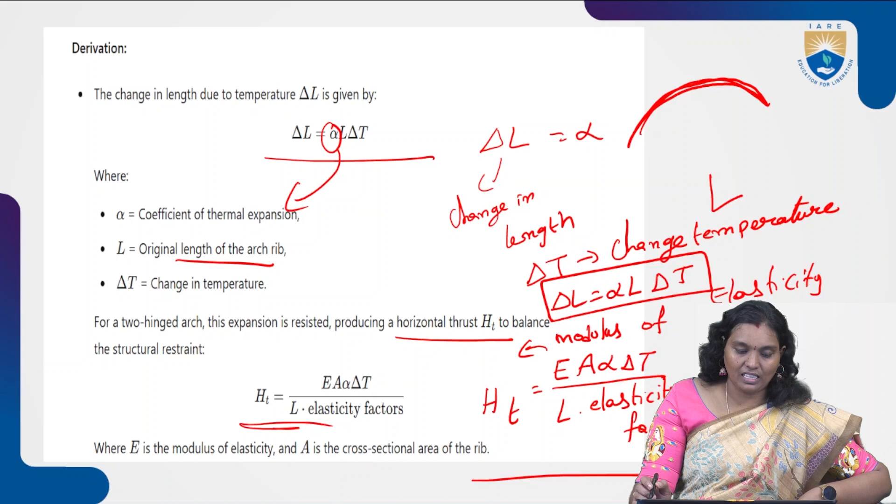E is nothing but the modulus of elasticity. It depends upon which type of material is used at the time of construction of the arch element. So that is the elastic constant, and it influences the change in getting this horizontal thrust. This is the formula we are using for these conditions.

Differential temperature occurs when the top and bottom of the arch rib experience different temperatures, for example sun on one side and shade on the other. So one portion may be affected by sun, and the other only by shadow. These scenarios we may observe within the length of this arch.

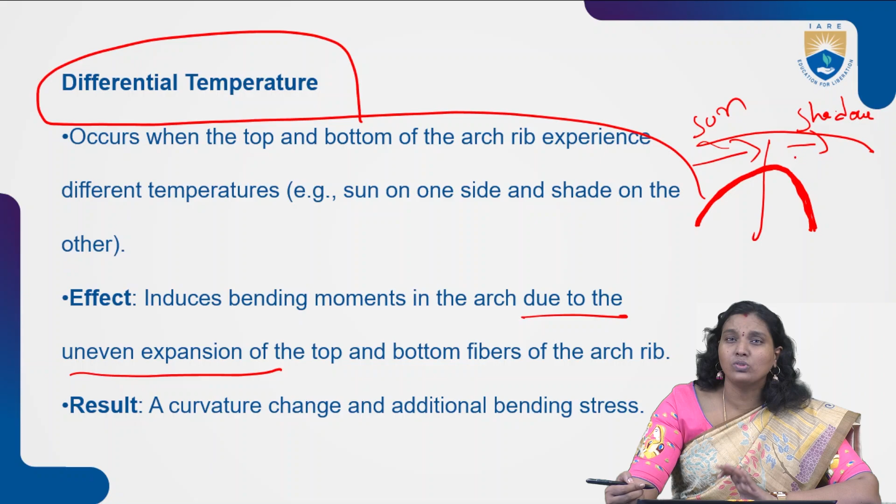So such temperature difference, how do we understand its effects and results? It induces bending moments in the arch due to uneven expansion throughout the length, since there is no similarity in the temperature effect. This induces bending moment due to uneven expansion of the top and bottom fibers of that particular arch rib.

Whenever we consider that throughout the length of the arch there is uniform temperature change, that is the scenario from the previous slide. Now for differential temperature, some portion of the length of the arch has a different temperature effect than the remaining portion. This depends on the location on the arch, and it affects the bending moment due to uneven expansion of the top and bottom fibers of the arch.

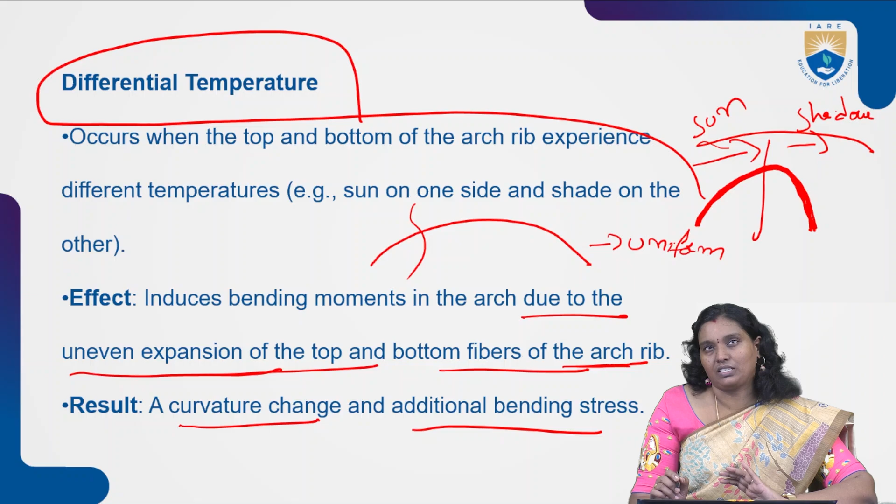This results in curvature change and additional bending stresses. These are the things we need to understand in differential temperature. At the time of differential temperature, we have to understand these kinds of scenarios regarding the bending moment.

Whenever there is uniformity, for that condition we have this normal thrust. The bending moment due to differential temperature is equal to E I delta T diff divided by R, where R is the radius of curvature of the arch rib.

I is the moment of inertia, E is the elastic constant depending on what type of material is used at the time of construction of the arch, and we also consider the temperature difference between the top and bottom fibers.

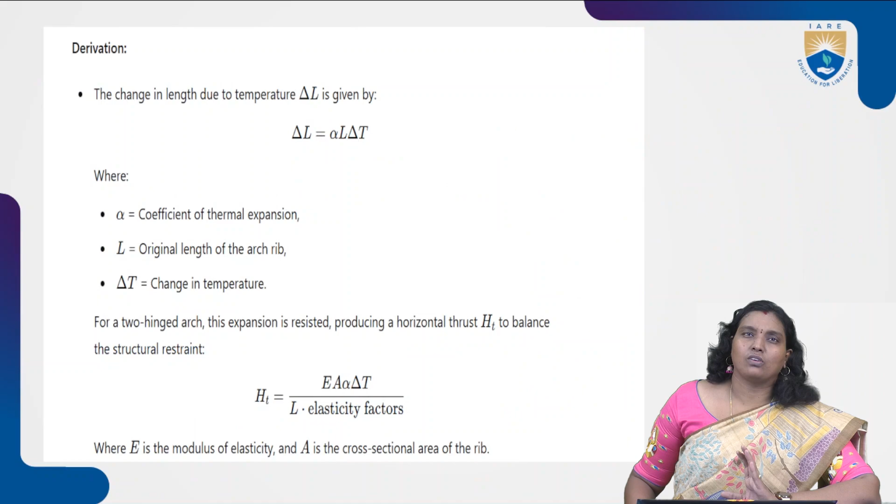So these are the temperature effects. Whenever we come under these secondary changes, those temperature changes may be uniform or differential heating of the particular arch, and these are the effects we get from these temperature changes.

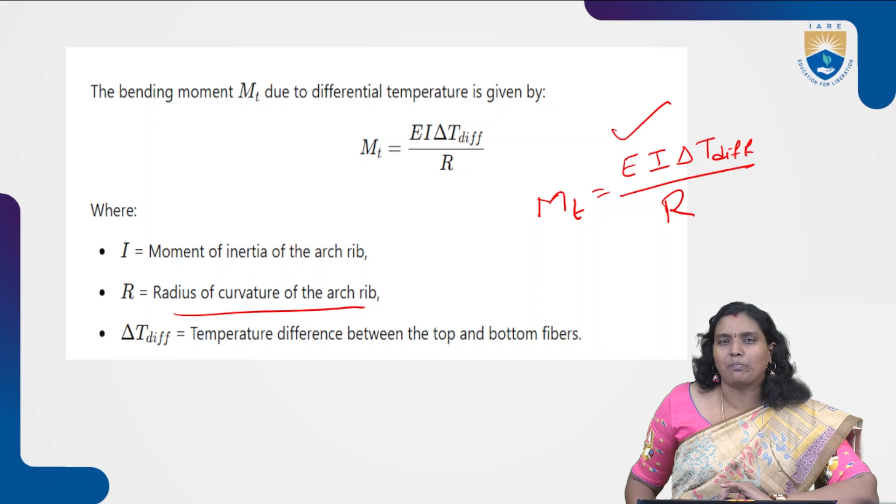Now, elastic shortening of the arch rib. It refers to the reduction in length of the arch rib under compressive forces. This shortening affects the geometry of the arch and creates additional secondary stresses due to elastic shortening of the arch rib.

It reduces the length of the arch, and because of these compressive forces, it affects the geometry of the arch and creates additional secondary stresses. Under applied loads, the arch rib experiences compression, causing a shortening in its length, which alters the arch's horizontal thrust and changes its geometry.

The shortening in the rib can lead to an increase in horizontal thrust to maintain equilibrium. This change in geometry is required because the shortening of the rib leads to an increase in horizontal thrust to maintain the equilibrium.

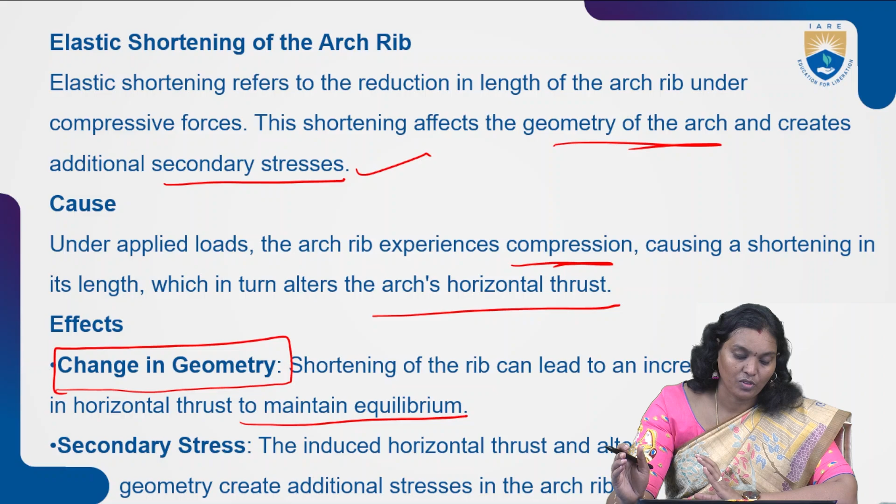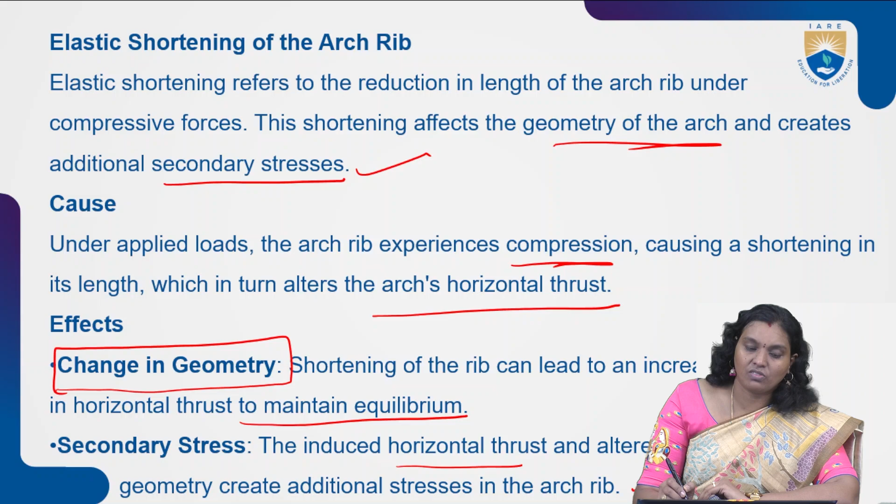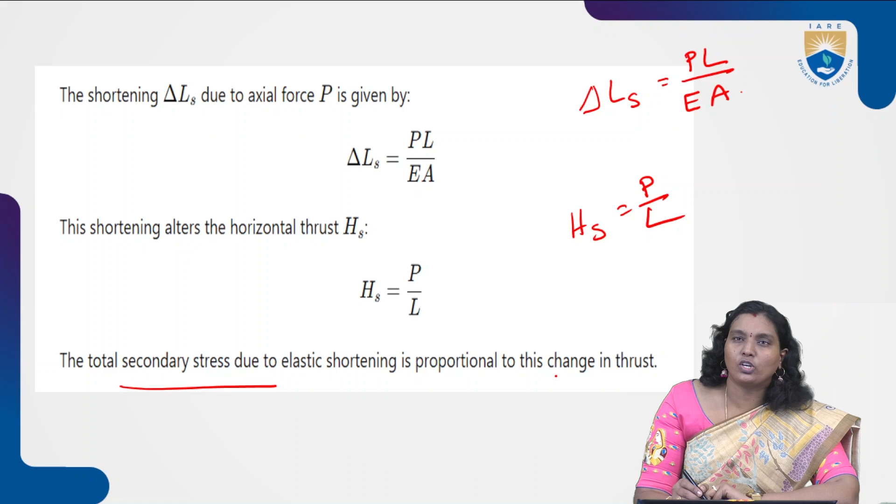So the total secondary stress due to elastic shortening is proportional to the change in thrust. Coming to total secondary stress, the combined secondary stress due to temperature effects and elastic shortening can be obtained by superposing the horizontal thrust and moment effects due to each phenomenon, affecting both the moments and the horizontal thrust.

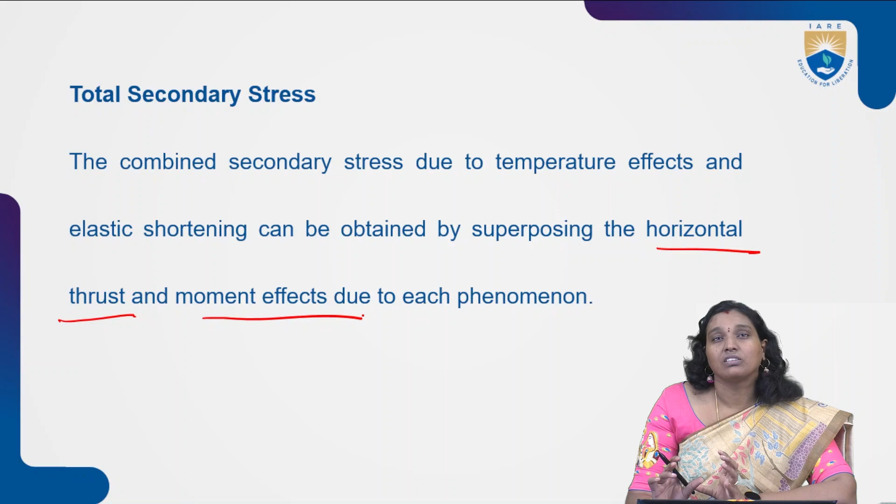For example, whenever a two-hinged arch has a span of 40 meters, and this curvature radius is equal to 20 meters. A uniform temperature is applied, and the modulus of elasticity is equal to 200 gigapascals. The cross-sectional area is equal to 0.3 meter square, and the coefficient of thermal expansion is equal to 12 into 10 to the power of minus 6 per centigrade. These are the given data. Now we are going to identify the problem: it is a two-hinged circular arch.

Now calculate the change in the length of the arch due to the temperature increase. According to the formula, delta L is equal to alpha L delta T. After doing all the calculation, we get this change in meters. So that is the change in length. Now determine the horizontal thrust due to this temperature, substituting the values we got, and based on the given data, this is the horizontal thrust value. Like this, we are understanding the problem based on the uniform temperature change in this particular condition.

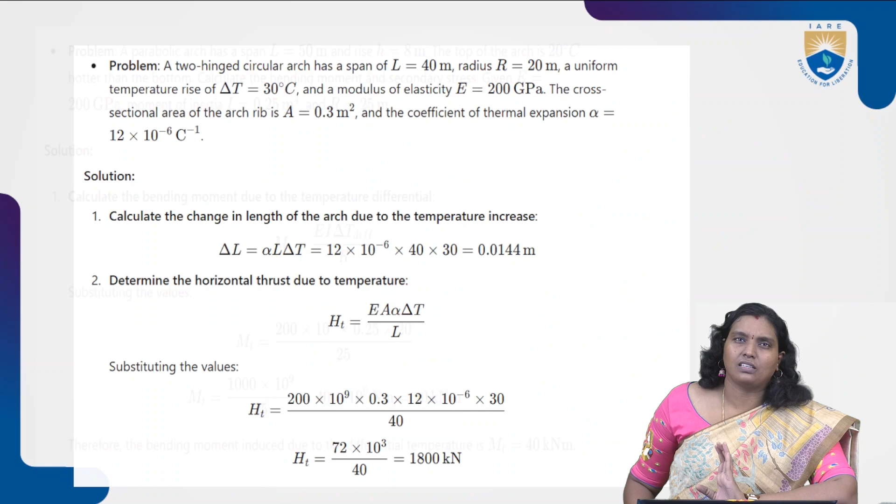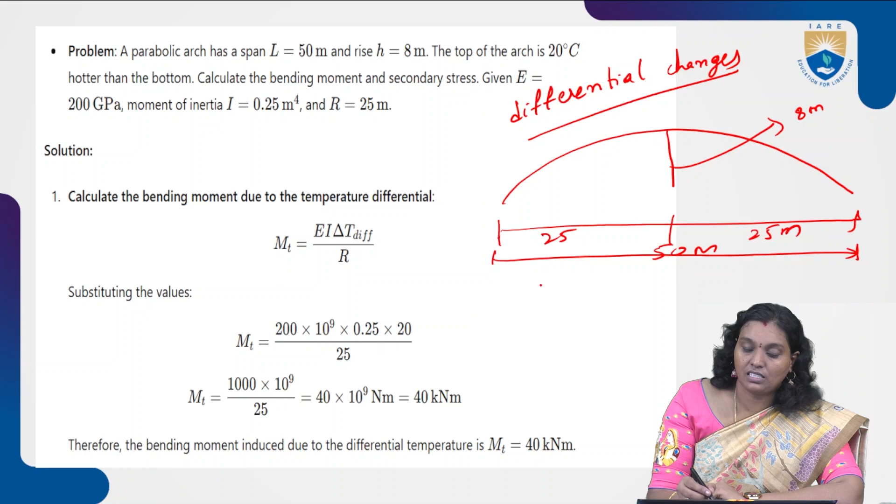Now consider a parabolic arch with a span of 50 meters, and the rise at the midpoint is equal to 8 meters. The top of the arch is 20 degrees hotter than the bottom, so here it is a differential temperature. It means there is a differential temperature change within the arch, where the top of the arch is 20 degrees C hotter than the bottom.

So calculate the bending moment and also the secondary stresses, for elastic constant E is equal to 200 GPa and moment of inertia is equal to 0.25 meter to the power of 4, R is equal to 25 meters. We use this formula, substituting all the values.

So the temperature difference here is nothing but 20 degrees. The remaining values are the moment of inertia, 0.25, and the elastic constant, so this is the value. Therefore, the bending moment induced due to the differential temperature is equal to 40 kilonewton meter as per the given data.

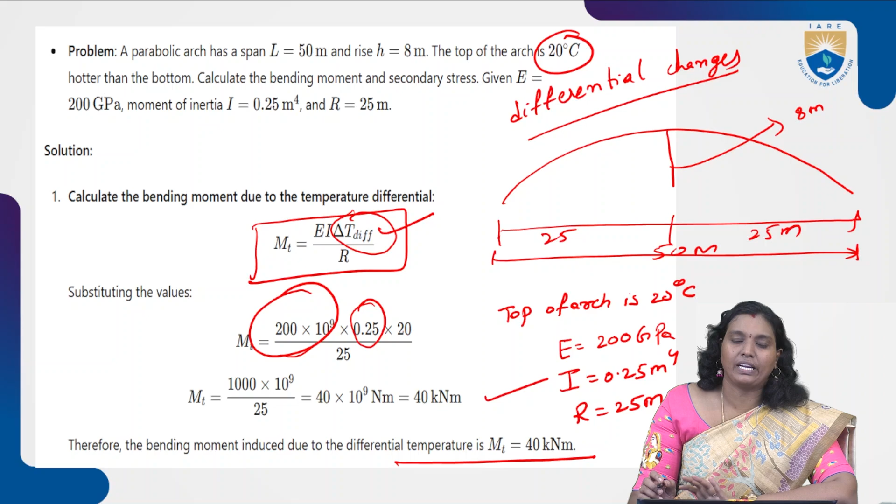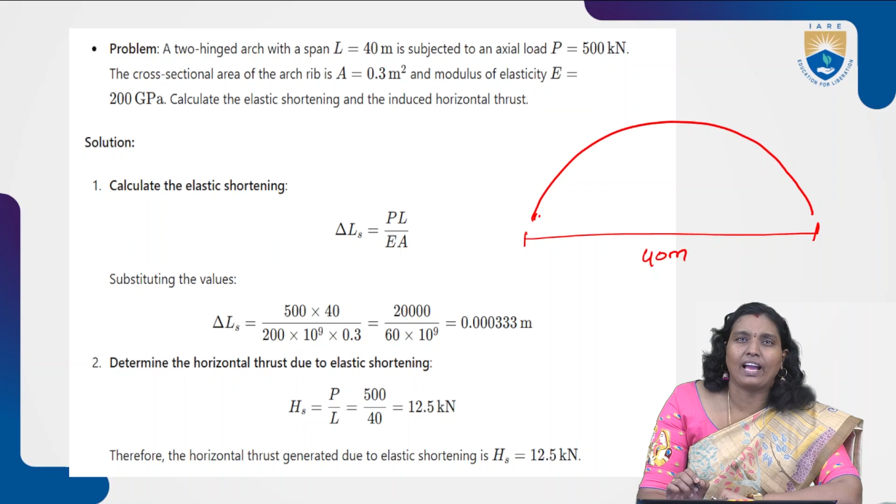Now, one more condition we are going to understand, that is a two-hinged arch. Here the length of the arch is equal to 40 meters, and it is subjected to an axial load of 500 kilonewton. The cross-sectional area is given, and the elastic modulus is given. Calculate the elastic shortening and the induced horizontal thrust. So it is a two-hinged arch.

Now calculate the elastic shortening, that is nothing but delta LS is equal to PL by EA. Substituting the values, we get the change in length, the shortening, which is equal to 0.00033 meters. This much shortening happens as per the given numerical values.

Now substitute all the values to find the horizontal thrust due to elastic shortening, that is HS is equal to P by L, equal to 500 by 40. So this is the horizontal thrust due to elastic shortening. Like this, we are understanding the uniform temperature and differential temperature conditions, and elastic shortening.

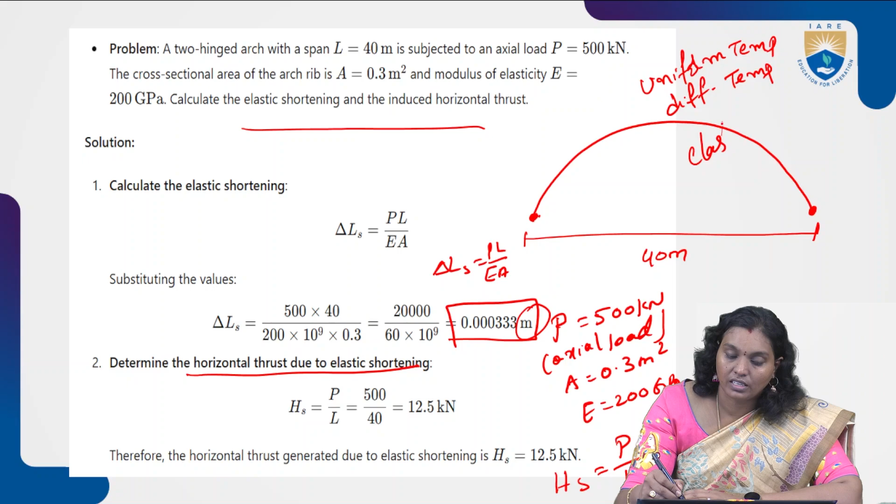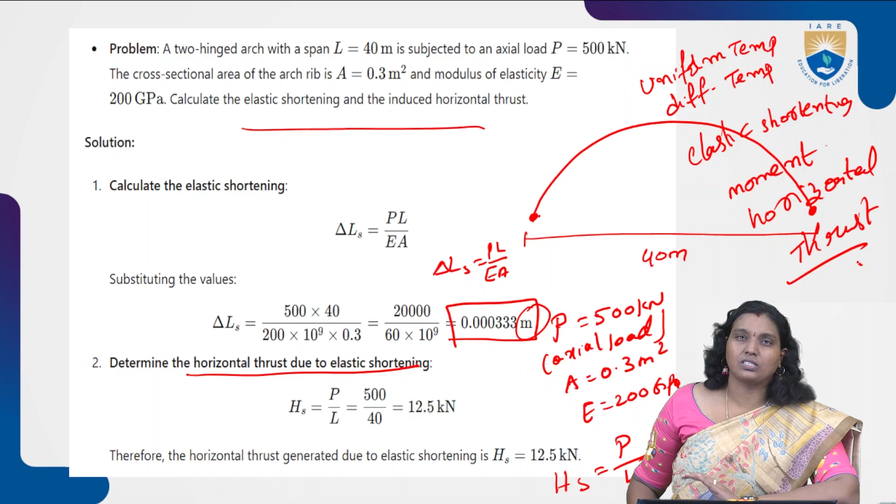In this, moment is going to change and also the horizontal thrust. These are the stresses which we are going to understand in this concept. So now combined effect of the temperature and elastic shortening.

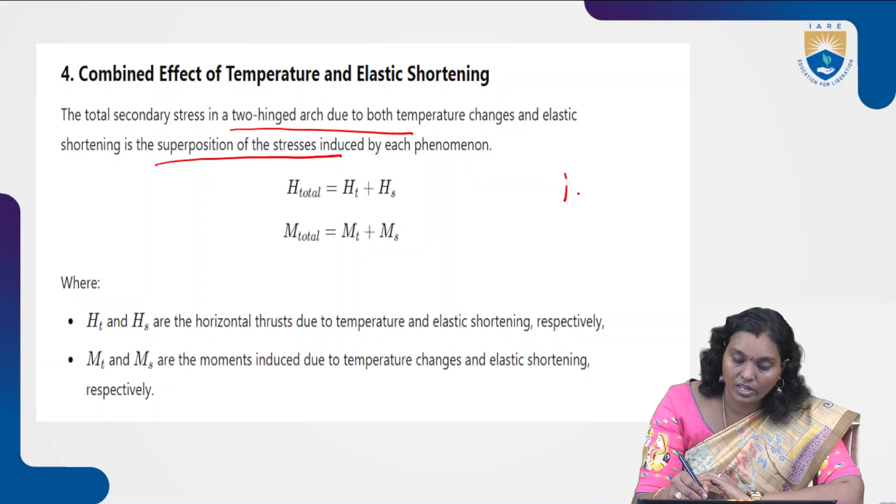So here the total secondary stresses in two-hinged arch due to both temperature changes and elastic shortening is going to be the superposition of the stresses induced by each phenomenon. So H total, horizontal thrust total due to temperature, whether it belongs to uniform or differential conditions. Now this HS is for the shortening, elastic shortening horizontal thrust.

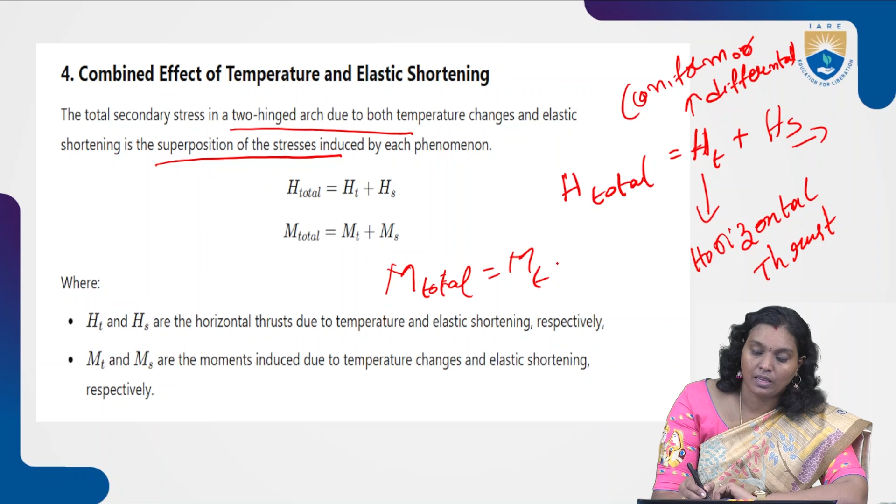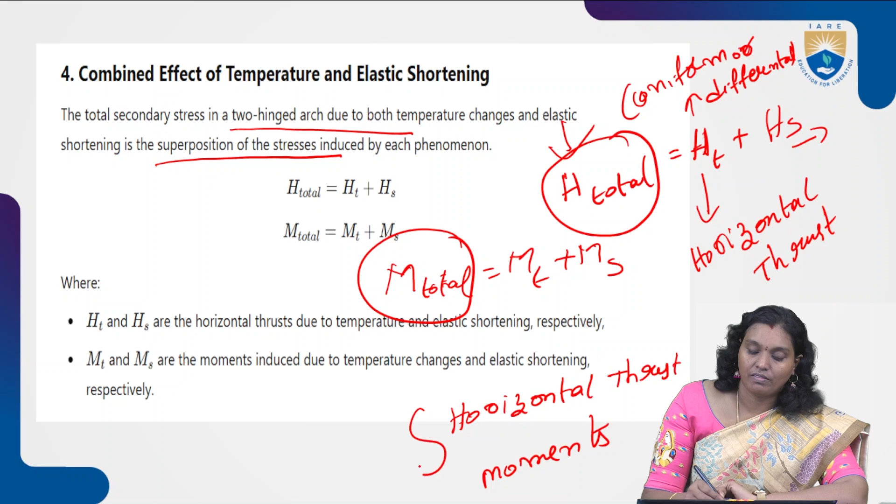Now this moment total is equal to MT plus MS. This MT is nothing but the temperature changes as well as the elastic shortening respectively. So this combined gives the total horizontal secondary stresses and comes under secondary stresses. Those are horizontal thrust and moments, which we are considering for both temperature and elastic shortening.

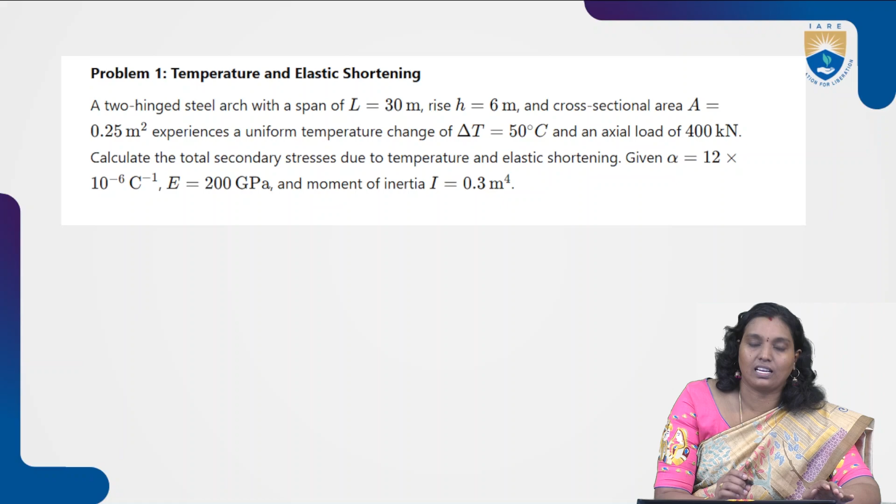Now consider one of the problems. Whenever we consider a two-hinged steel arch, here they mention the type of material. Because based on the type of material, the elastic E is dependent. So here it is a two-hinged steel arch with a span of 30 meters.

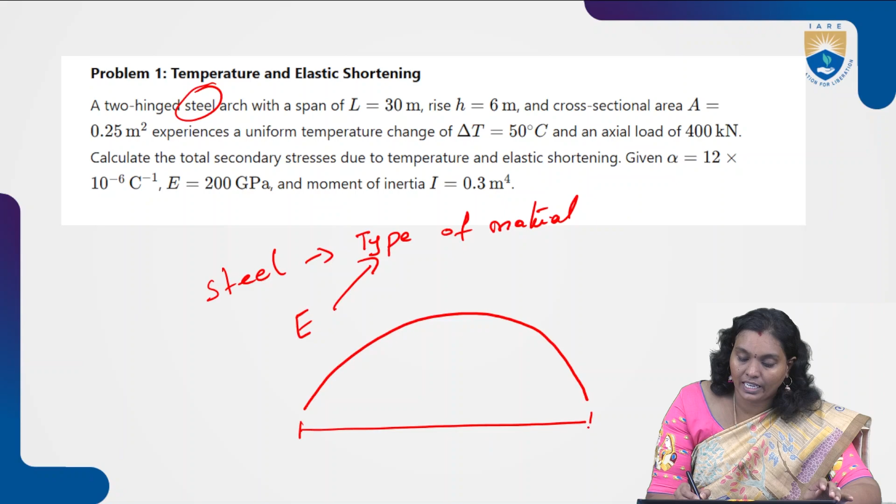And a rise at height, so it means from here to here, 15 meters and 15 meters. So the rise, it is nothing but H is equal to 6 meters. And the area of cross section, the total area of cross section is given as 0.25.

Here it is considered under uniform temperature changes. The complete element, this steel arch, is going to change its length, or whatever secondary stresses are getting generated, is based on the uniform temperature. So throughout the length of the span, it affects this, it's under the same temperature conditions. So that is the change of temperature, that is nothing but delta T is equal to 50 degrees C.

Here, the total is under an axial load of 400 kilonewton. Now, calculate the total secondary stresses due to this temperature and elastic shortening.

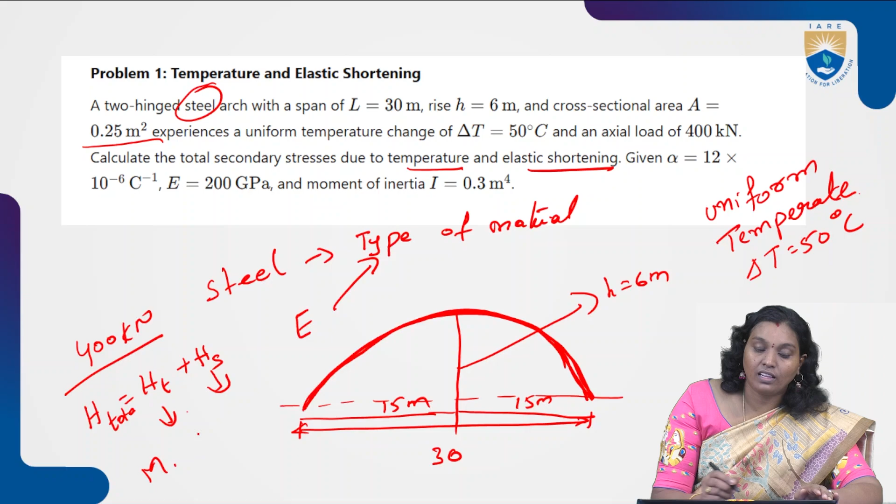So the total temperature stresses, that is equal to HT plus HS. This is the horizontal thrust from temperature, under uniform temperature conditions, and also the horizontal thrust from secondary elastic shortening movements. So here the secondary stresses are horizontal thrust as well as moments. These are the stresses. So total is equal to MT, moment from temperature, and secondary stresses from elastic shortening moments. So this is the total.

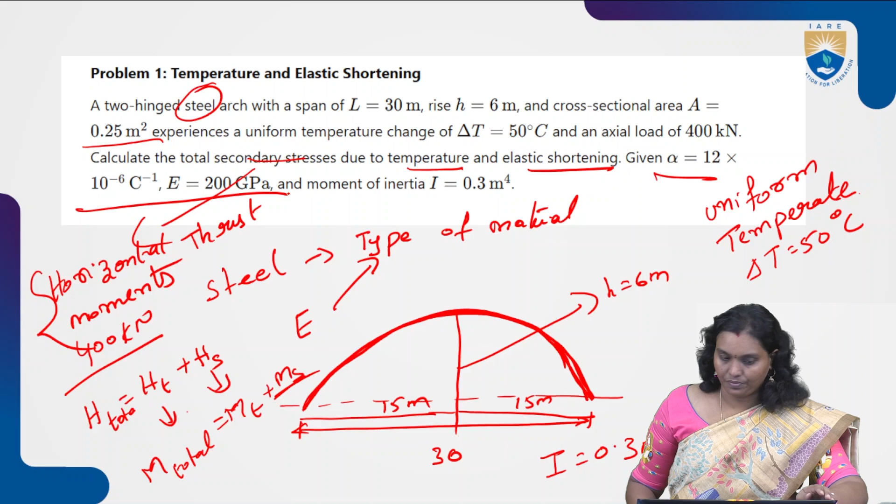This we are going to find out for the moment of inertia 0.3. And also he mentioned expansion is also given. This is the given data. These are the things we are going to find out. These are the secondary stresses.

So now this is the given data: the overall length of the span of the arch, rise, cross-sectional area, uniform temperature change, axial load, coefficient of expansion, modulus of elasticity, moment of inertia. These are the things they have mentioned.

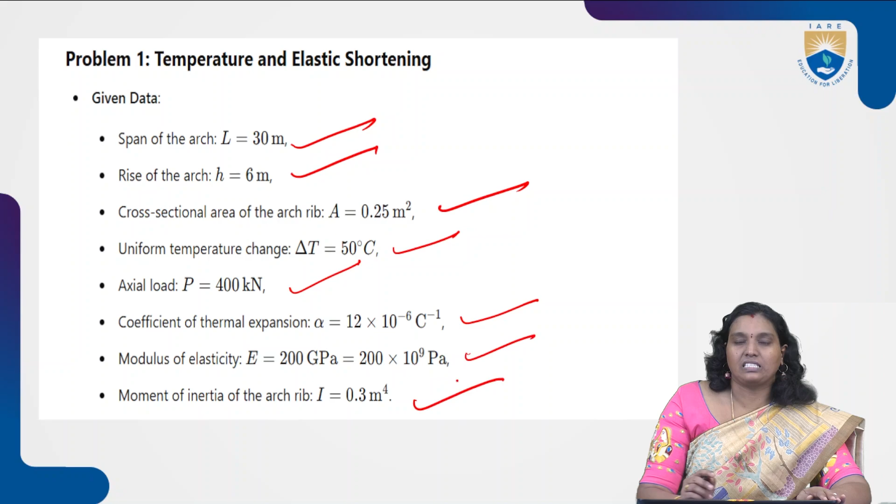So now calculate each and every step. After that, combine those values, that gives the total horizontal thrust, and that is nothing but the secondary stress which is coming from the effect of the temperature as well as the elastic shortening.

So now this elongation of the arch due to temperature, this formula is equal to delta L is equal to alpha L delta T. Substitute the values, and this represents the expansion of the arch due to temperature change. Now calculate the horizontal thrust generated due to this temperature change.

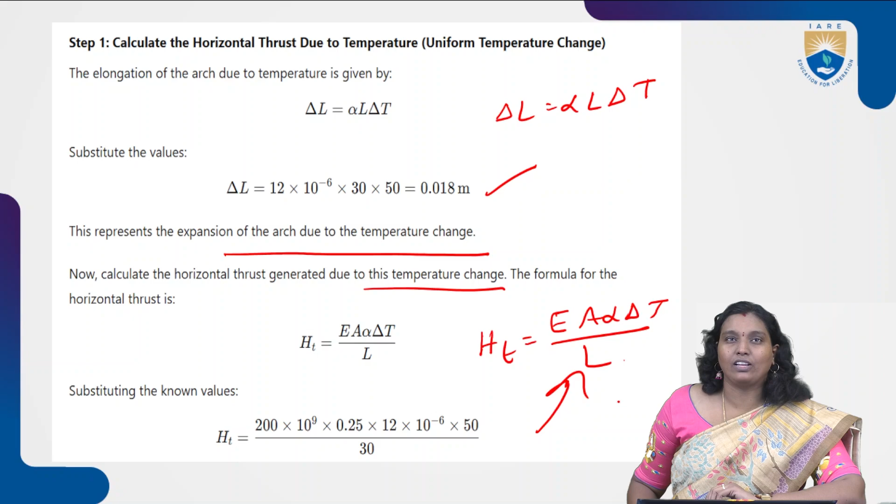That formula is equal to... L. So substitute all the known values into it. We will get the horizontal thrust due to uniform temperature increase. So this is the value. Now we find out, from temperature we completed the horizontal thrust.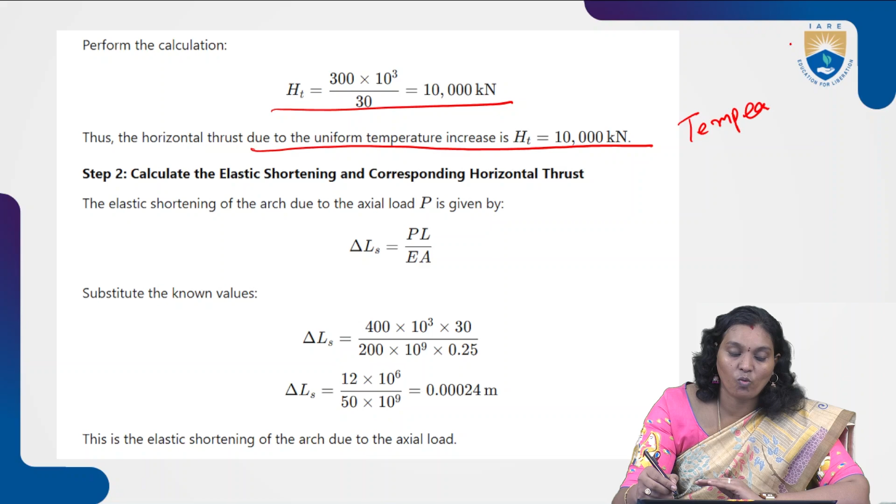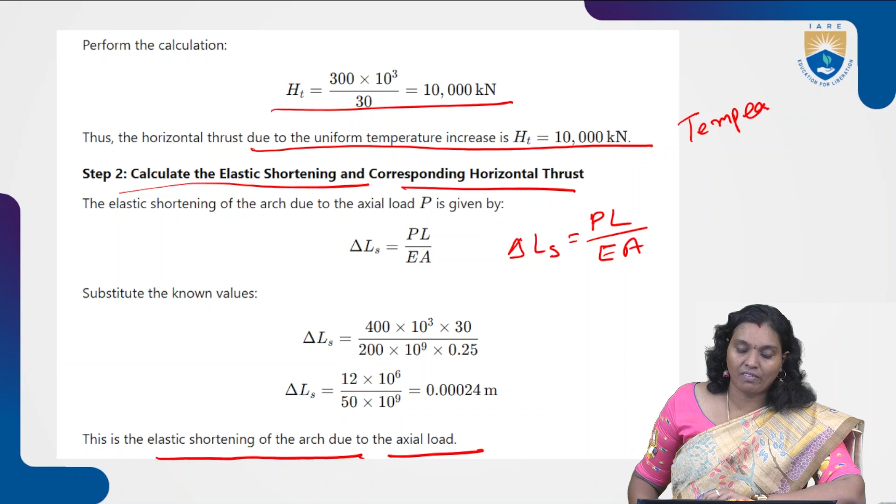Now move on to calculate the elastic shortening and corresponding horizontal thrust. So this is the formula for elastic shortening for the horizontal thrust. So substitute all the values, we will get the elastic shortening of the arch due to the axial load.

Now the horizontal thrust for this elastic shortening, we know the formula. According to formula, substitute the values, we will get the horizontal thrust due to elastic shortening.

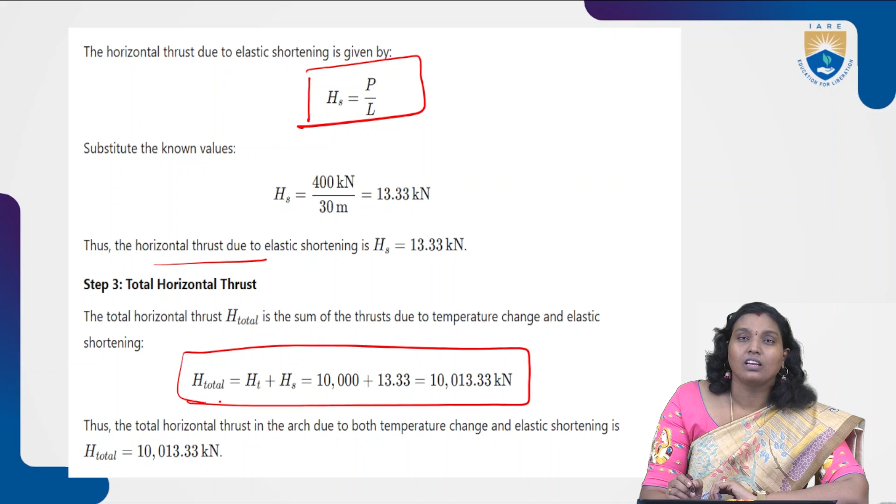After getting this, find the addition of this to get the total horizontal thrust. That is one of the secondary stresses coming from both conditions, based on the temperature effects as well as the elastic shortening.

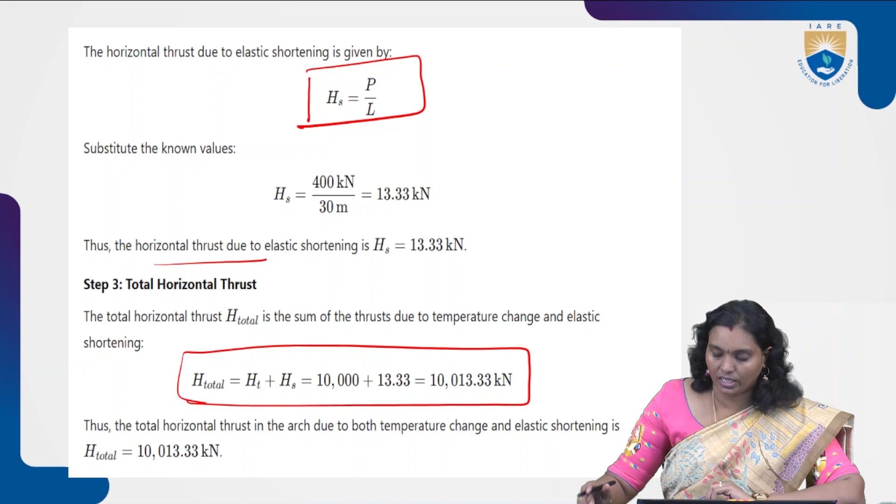Now another problem. This is also a two-hinged arch, subjected to differential temperature change. The previous one was a uniform temperature change; here it is differential temperature change, where the top fiber is 15 degrees C hotter than the bottom fiber.

The cross sectional area is 0.4 meter square, the moment of inertia is given, modulus of elasticity is mentioned, and the coefficient of thermal expansion is known. Find the bending moment and horizontal thrust generated due to this differential temperature.

First find the moment due to differential temperature using the formula. Based on the formula and the given data, substitute all the values to get the bending moment induced due to the differential temperature.

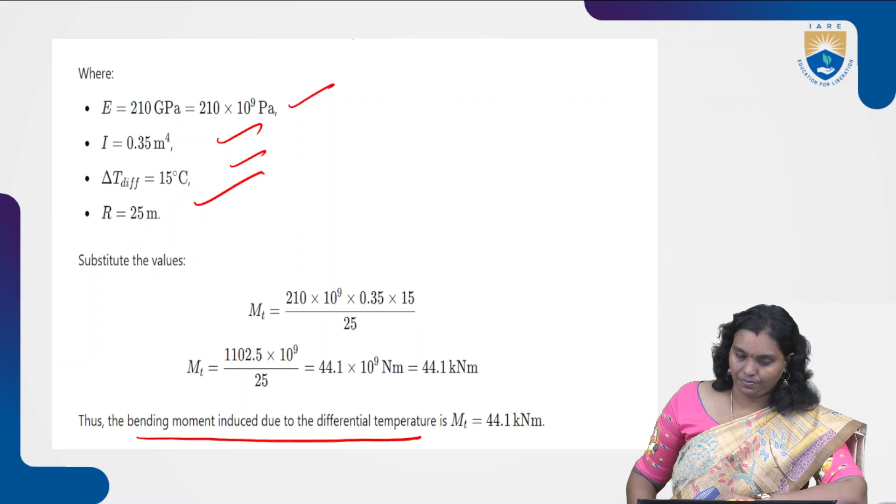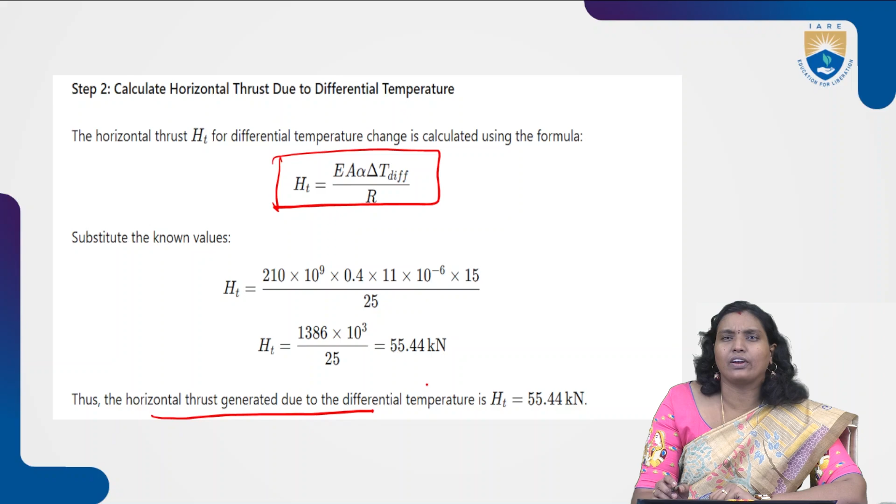Now calculate the horizontal thrust due to the differential temperature. Based on the formula, we find the horizontal thrust generated due to this differential temperature.

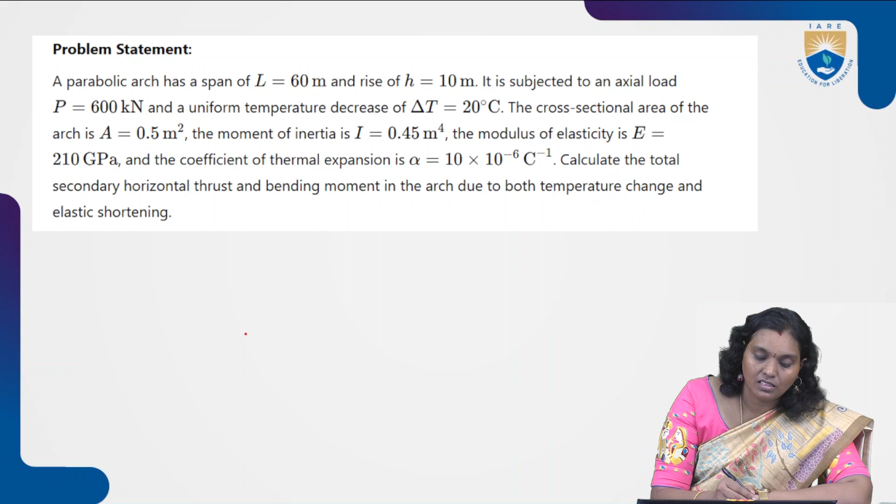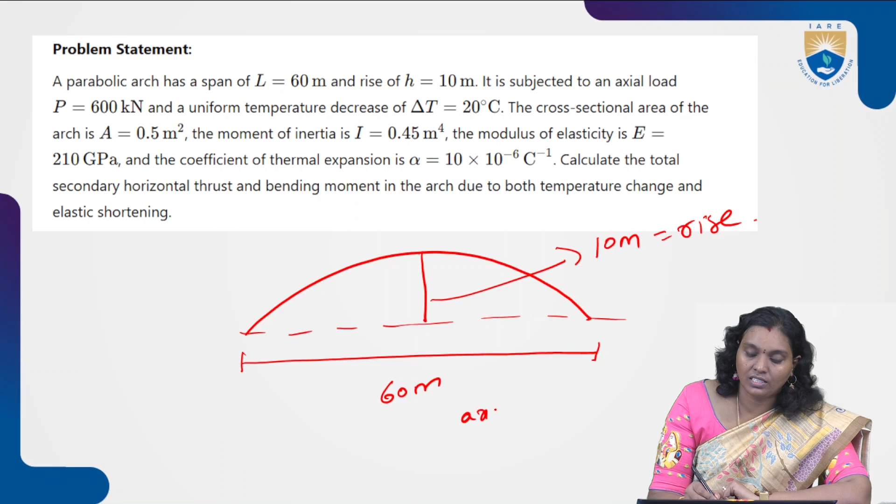Now another problem. Understand this: a parabolic arch which has a span length of 60 meters and rise of 10 meters, subjected to an axial load.

The axial load is 600 kilonewton and there is a uniform temperature decrease, so delta T is 20 degrees C decrease. The cross sectional area of the arch is 0.5 meter square, the moment of inertia is mentioned, modulus of elasticity is there, and the coefficient of thermal expansion is known. Calculate the total secondary horizontal thrust and bending moment in the arch due to both temperature change and elastic shortening.

Step 1: first find out the horizontal thrust due to temperature changes.

Find the horizontal thrust from elastic shortening, and add those two. That gives the total horizontal thrust from this condition.

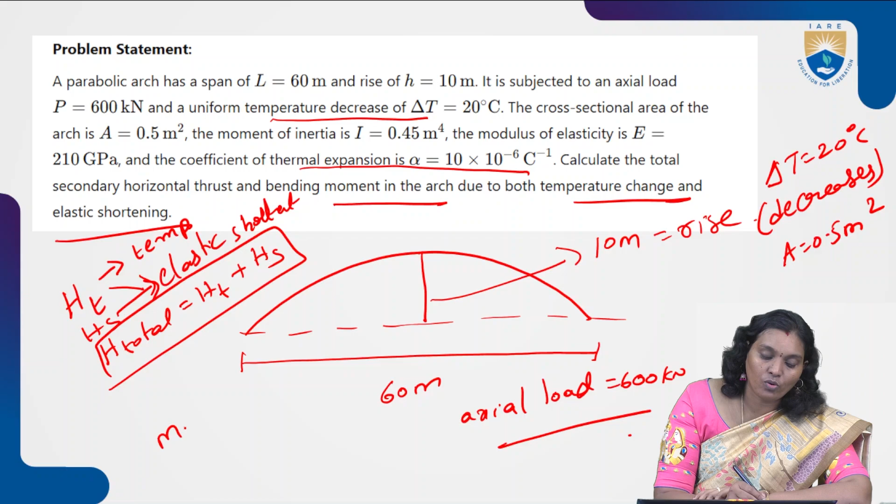Similarly, find the bending moment. In step 1, find the bending moment due to the temperature effect, and find the bending moment with respect to the elastic shortening. That combination gives the total bending moment from both conditions.

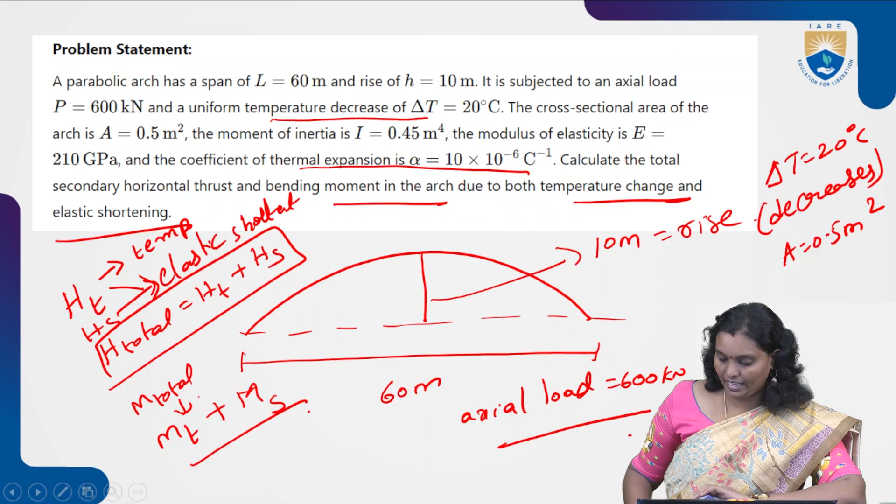So like this we are solving the problem. First, find the horizontal thrust due to temperature change. The first step is to find the temperature change, whether it belongs to uniform or differential.

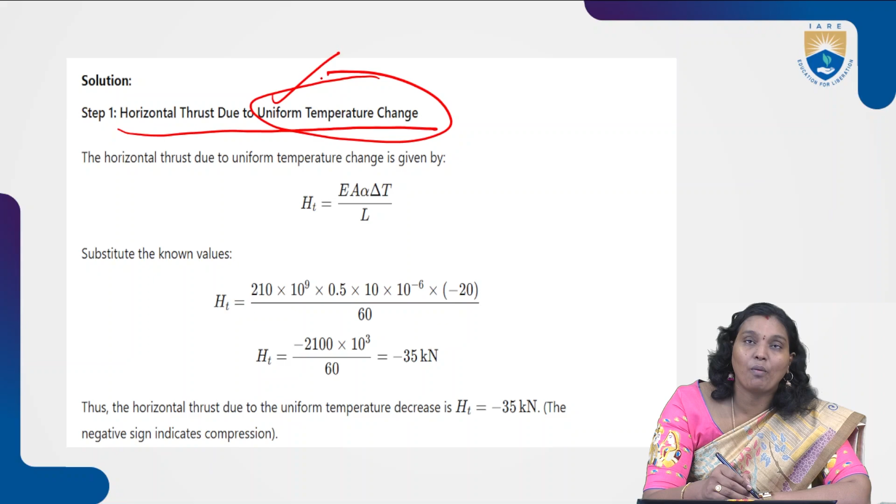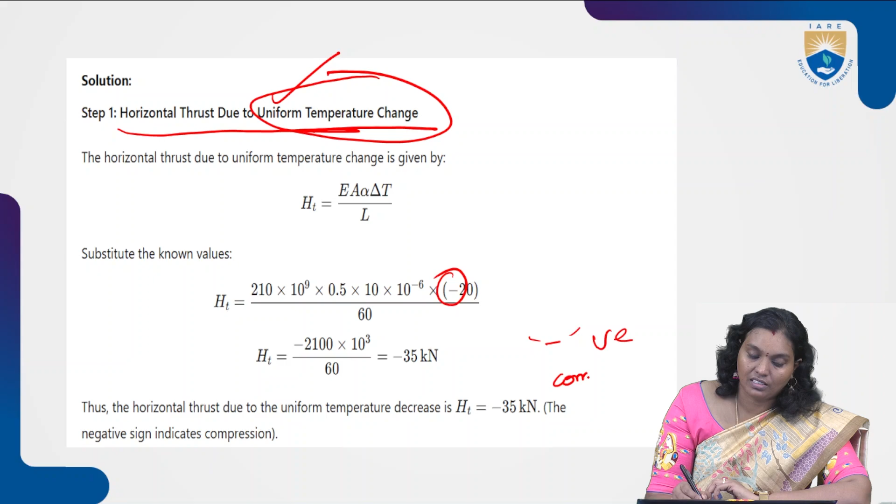Using the respective formula, we find this. Here it is a decrease, that's why we use this negative minus sign, which indicates compression.

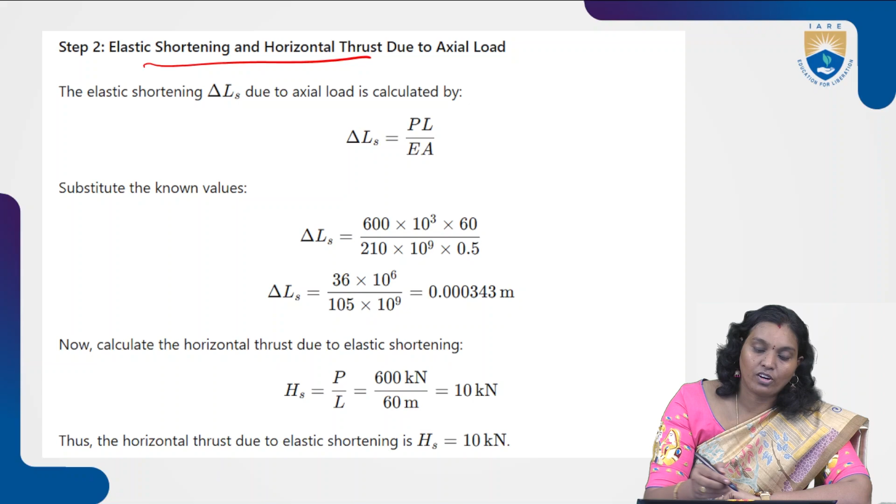Now elastic shortening and horizontal thrust due to the axial load. Find the elastic shortening, substitute the values, and finally we get the horizontal thrust due to this elastic shortening condition.

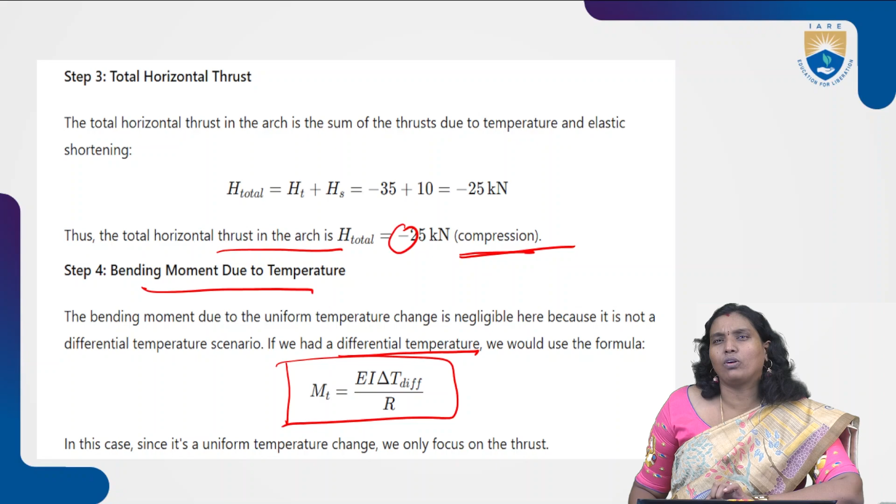If it is differential, we use the formula accordingly to find the moment due to temperature. So like this, we are understanding these kinds of scenarios.